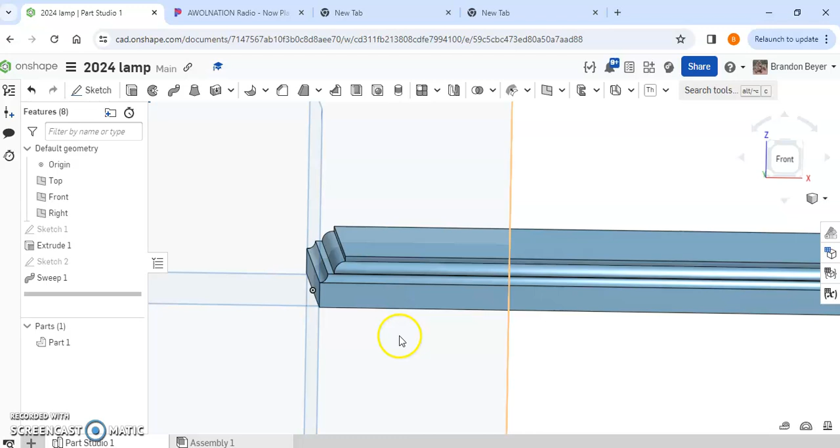All right, so this should be a pretty quick one. Basically, I just want to show you how to make a trim or a profile from a router bit on a piece of wood in Onshape.

So I wasn't sure that this was going to work. I kind of just accidentally stumbled upon this ability. But basically, you go ahead and draw yourself a piece of wood, a block, a rectangle, square, whatever.

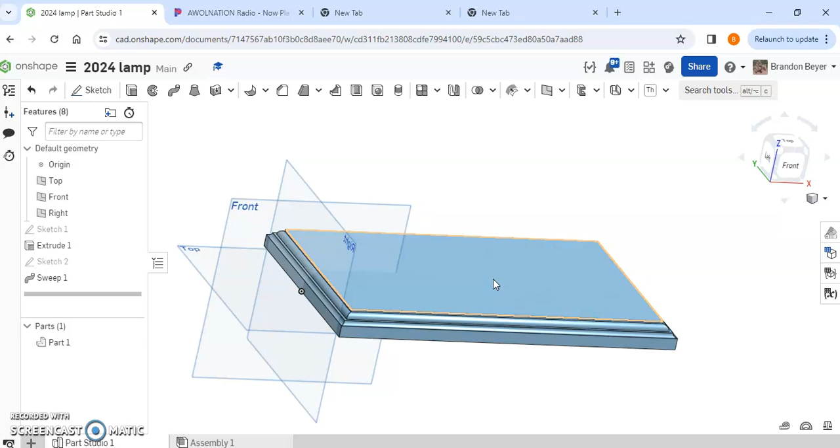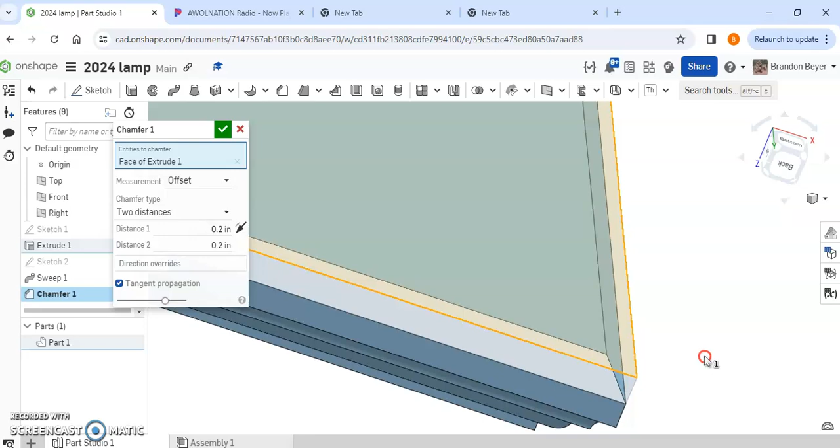And then let's say you want to put this edge on there. Normally you could just throw a chamfer. There's a chamfer tool. You can click on that, and you can click the whole face or one edge at a time. So if I just click the face, it's going to go ahead and throw that chamfer on all the way around nicely for me.

It'd be nice if there was a tool that allowed you to set different shapes or styles of router bits or trim bits, but I don't think there is. So I was wondering how else I can do that, and I kind of figured I'd try something.

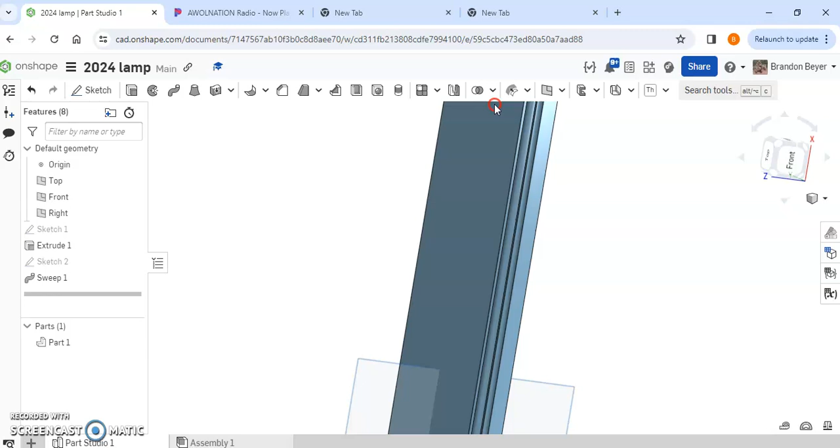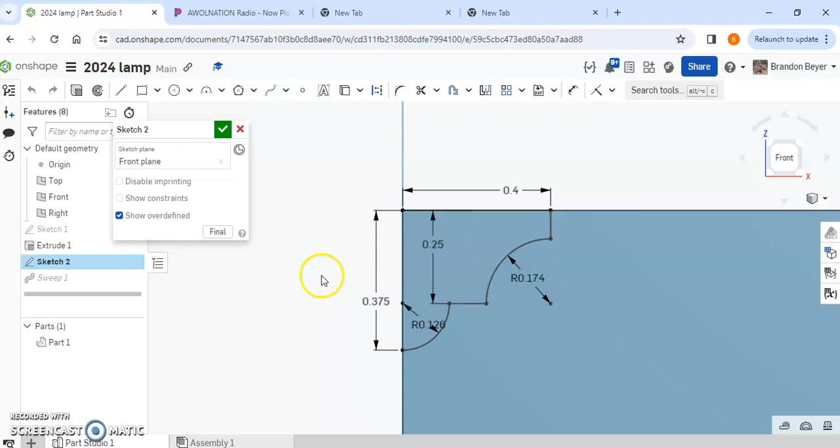So what I did is I went to my second sketch here, and I created a sketch that simply matched the profile of a standard router bit. Now, I don't know if these radiuses are perfect. I have to actually do some more measuring and critiquing, but it's the gist of the shape. It gives me a good visual representation at least.

And I take that shape and I'm going to sweep it around the edge. So if you haven't used a sweep before, a sweep takes a sketch in one direction and follows a line in a different direction or even the same direction.

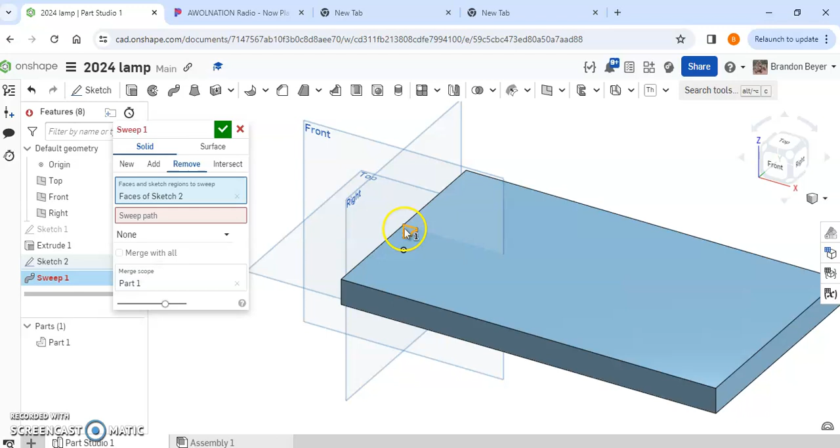So I just click these lines around the top, and if I just unselect them, you'll see... here we go. So unselect, unselect, unselect, unselect. And so I have the face of my sketch selected as the profile, and then the sweep path is going to be these lines here. Every time I click a line, it's going to add that edge right to the end, all the way around. Really easy, quick, and simple to do.

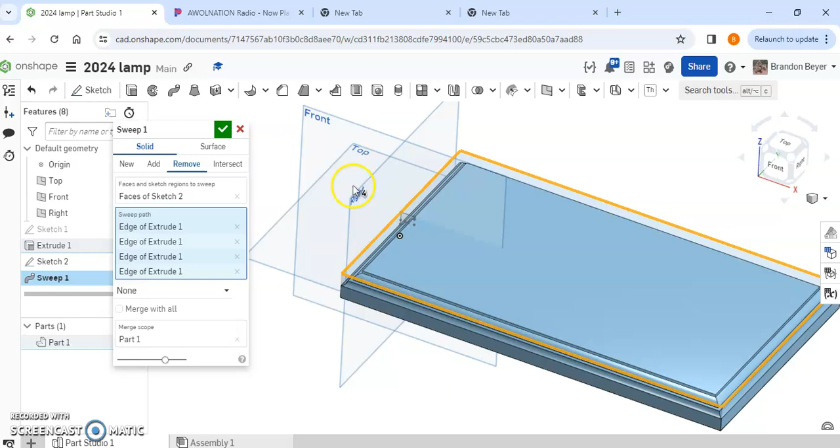The only caveat is that I haven't tried it, but I believe this sketch has to be somewhere in the middle of that line. If, for example, I had the shape flat against the front plane here, and my sketch was still there, I don't think it would end correctly where those corners meet up. I could be wrong, I haven't actually tried it yet. I might do that on camera here in just a second just to see how that would affect things.

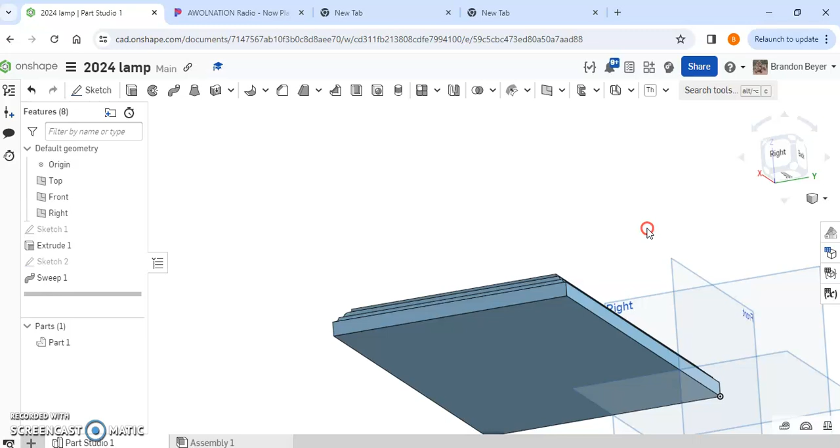So if I go to my first extrusion, instead of making it symmetric, I let it go one direction. Then we can see, oh, it still works. Still works fine. So I guess you could just draw that flat. I was worried that this last corner wouldn't cut out correctly, but it looks fine. So I guess you could do that either way, and it's going to work for you.

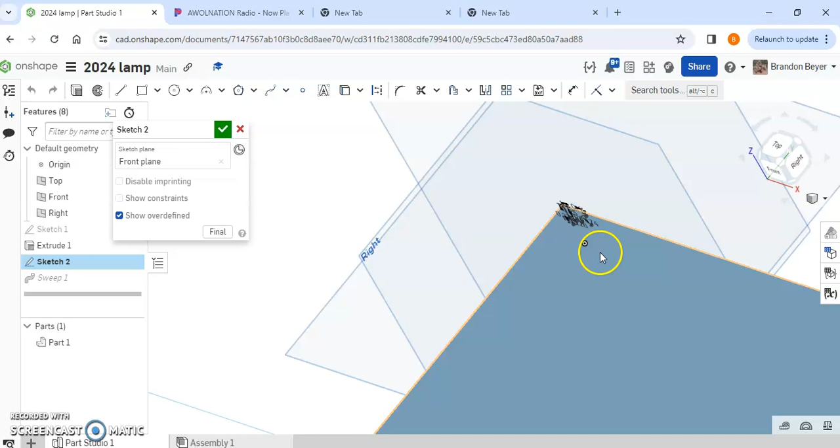So that's pretty neat. I didn't think it would work because it's sort of floating out there. Yeah, seems to work just fine.

Cool. So if you want to make a fancy profile or a custom edge on something, whether you're 3D printing or carving it with wood or whatever, you can definitely do that with the sketch and sweep, just going around this perimeter. Hopefully that was helpful.